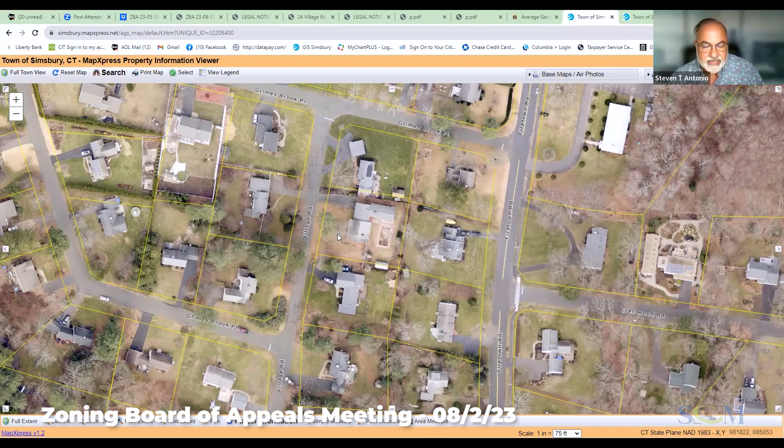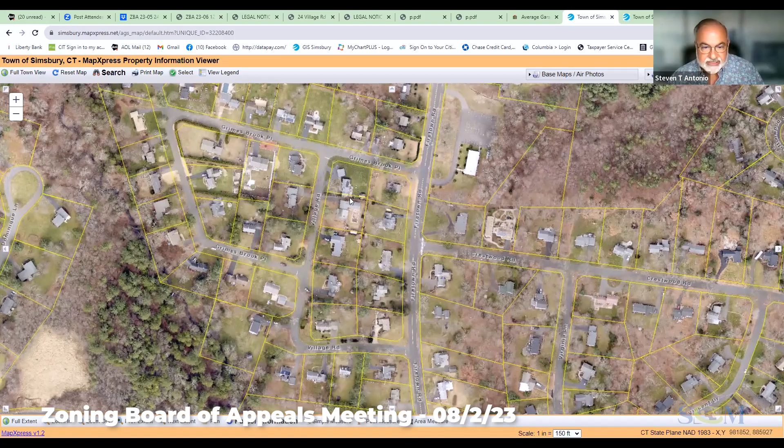My concern, just to bring it to light and why I wanted visual assistance, is he's asking for a 35-foot or 37-foot setback right here, which puts it considerably more forward than any abutting property owner up or down this street, with the exception of this weird one, which was approved in 1984. I'm not really sure what the hardship was that they approved that. I haven't seen anything in my tenure where that would have been approved. But you can see he is a little back, but going a full 37 feet, just to vocalize my concern so we can acknowledge it.

This puts him much closer to the road frontage than any other house in the neighborhood, and I'm worried about setting a precedent. I do understand the hardship and I feel for him and I understand it. As you can see, it's a single car garage, which is very dated and not the norm anymore, but I'm not sure we have the luxury to include in this particular thing.

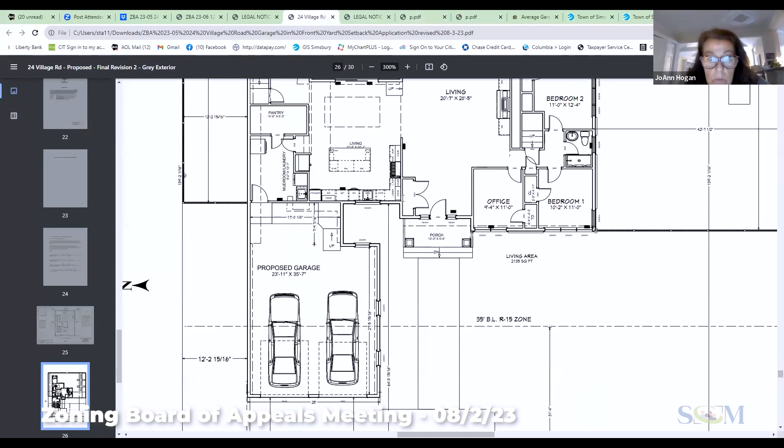Let me stop sharing, or maybe I can just show us. I apologize while I go through, find out which one. There we go. This is the one. So I'm not sure if we could suck up this little area here somehow and bring it closer in general. That's the 7 foot he was describing as the additional, but to be frank, it looks like 7 feet 9 inches plus this area from this point to the front of a car doesn't seem to be minimalized.

And Tarek, one of the things we do is, first of all, we make sure we can't put it somewhere else, but we also minimalize the variance. So that's why I'm bringing this up, is if we can minimalize the variance, it's easier for everybody involved. And that underscores my biggest concern, which is the depth of this garage.

And if anything can be put to this area to the right, we close off this area and allow some of this to be within this area and move the whole garage closer to the house. Tarek, are you following what I'm saying by chance? So your garage, if you will, would be in here, that service area. This is Ram, I have a question.

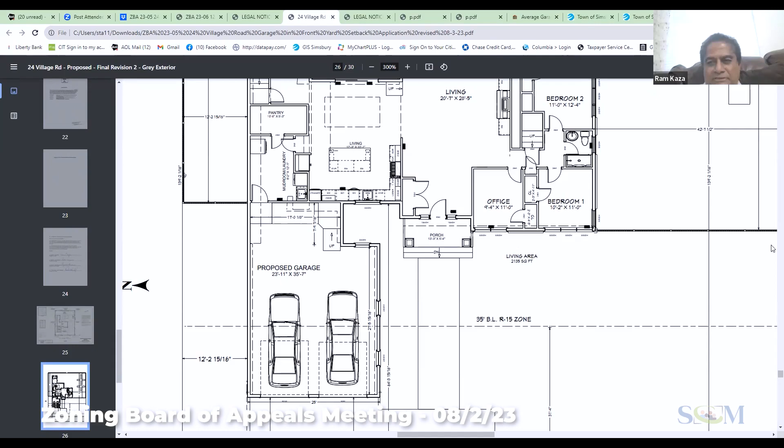Go ahead, Ram. If it is too close to the road, is there any safety concern backing up the car from the garage? I don't think so, to be frank. No, because there's more than a car length at least, and this includes a K-turn area, if you will.

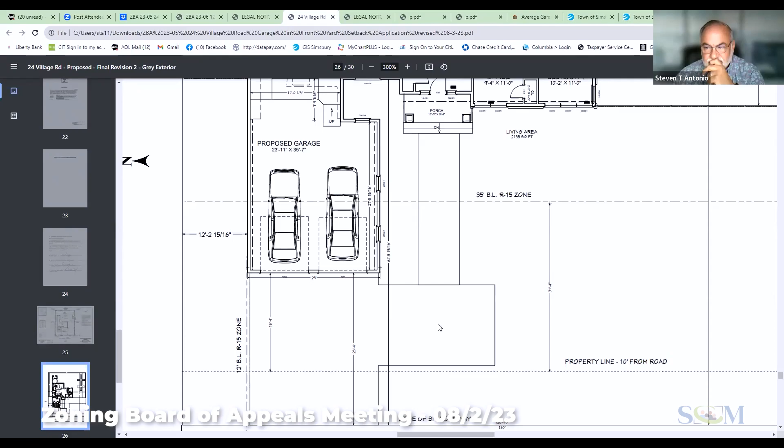Okay, so I understand your point, Stephen, for trying to minimize the footprint. Again, we're looking to accommodate this accessibility ramp here, and so I understand that's in conflict with the objectives of the ZBA, and so if there's as well.

So where it says up, yeah, your cursor's on there right now. Is that the ramp? That's the start of the ramp, yeah, and that travels up. The grade of an accessibility ramp is very low, right, and so even a short rise of 2 feet has a long runway.

That's where I was, Tarek. So if you took this up ramp and made it perpendicular and put it right here, that's pulling us a good 3 or 4 feet forward, just by having the ramp not have a 90 degree turn, which, if I'm not mistaken, is not the best thing to have multiple turns within a ramp.

So yeah, it's like I said, we work with people. We're not just flat out yes, we're not flat out no. We work with you to see what you think is a viable consideration for a meeting ground, if you will. Sure.

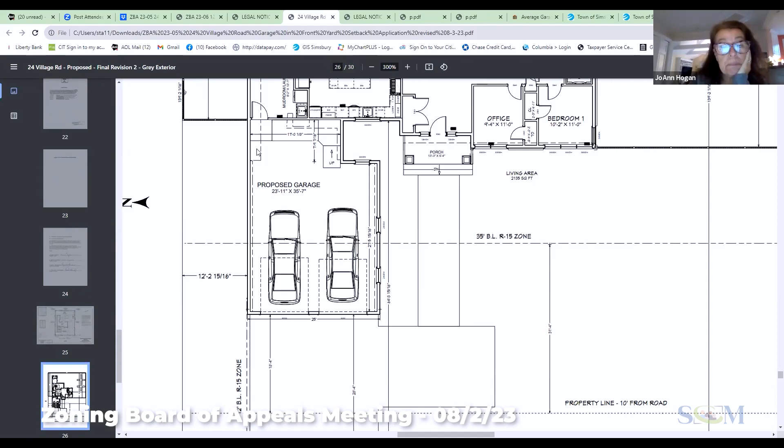Well, it's also, just to bring it back, it's also the topographical, keeping it in line with the other frontage setbacks of his neighbors. Yes, it is the same. It's actually a little bit of a lesser step.

I understand this is from a previous ZBA committee many years ago, but it is less than the setback from the neighbor to the north, just as a visual, which is just that weird one, so that one sits closer to the road than what you are proposing.

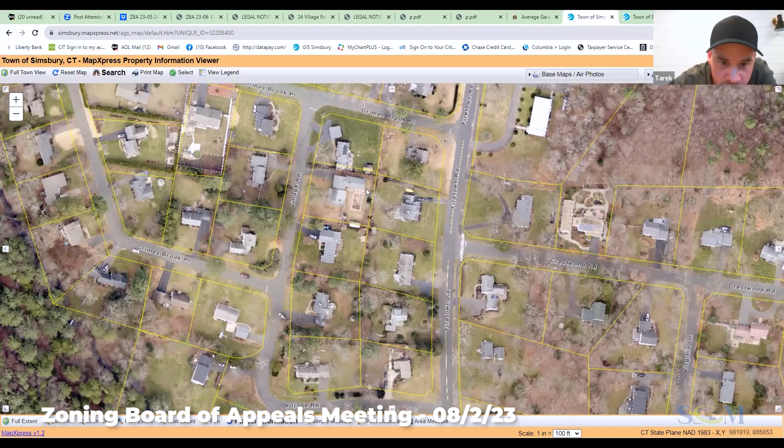Correct. And visually, like on that road, it's kind of amazing, the property to the south, even though they didn't require a setback, their garage is further back. Visually, I think it will look more or less the same. But I think, to your point, Stephen, that would be the area we'd try to absorb some depth at the front of the car, instead of going against the house entirely and losing that little bump-out section.

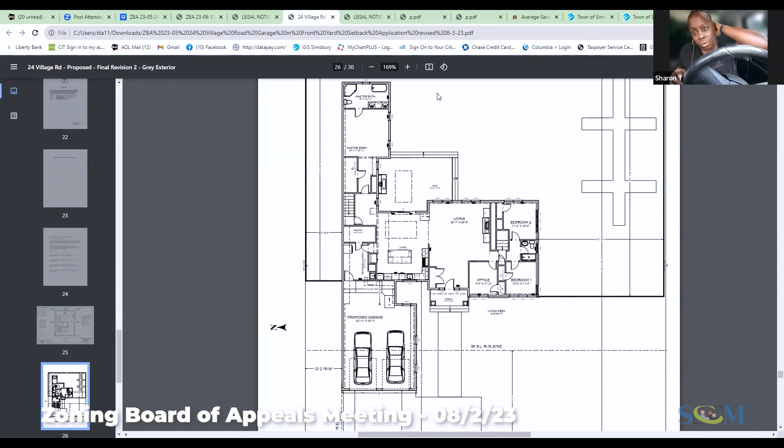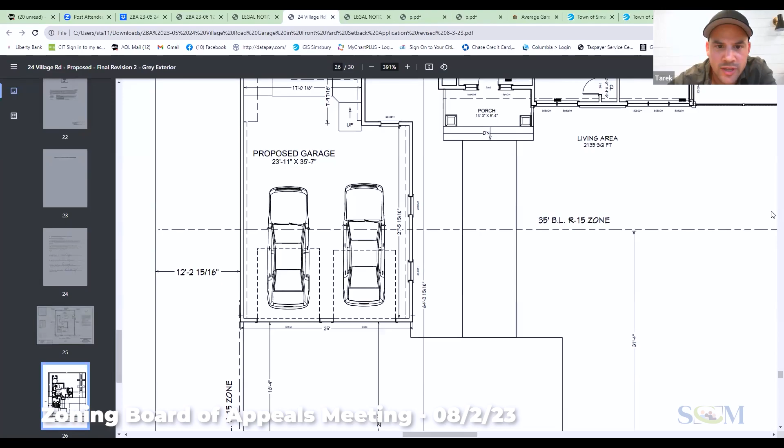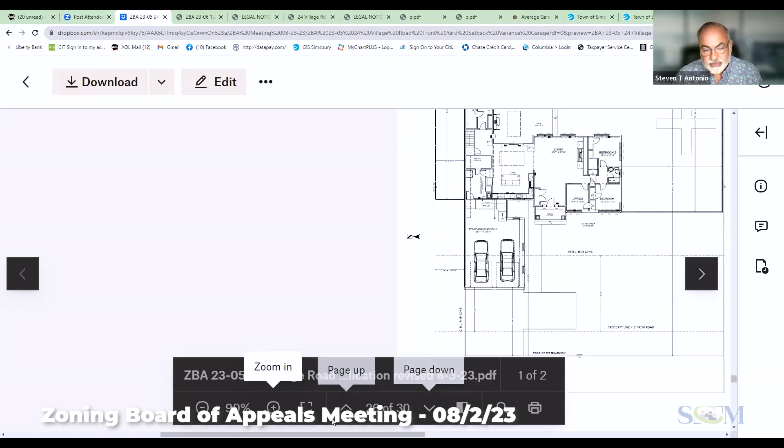While you're doing that, I just want clarification. I understand everything around the setback, but going back to the accessibility ramp, are you saying it's going to be straight on or is it going to have a curve? It will have this curve - this was actually designed with the handicap person, they said this is basically what they wanted. So is it sort of up and then the turn over there? Yeah, 36 feet is a lot of room, a lot of typical space. For a garage, I actually looked it up - your average garage for a 2-car is 20 by 20, 22 by 22, or 20 by 22. These are just standards, so I know they want their ideal scenario, but I'm just trying to find the halfway ground.

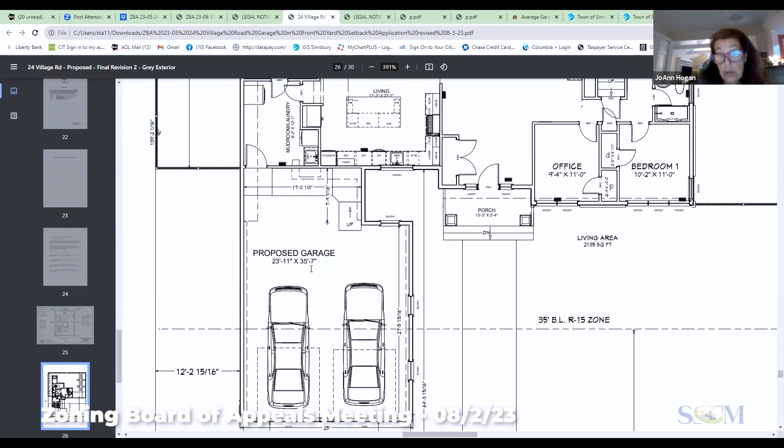Which is why they advise you to do a turn - just to be able to get the grade, we had to do a turn, the length, for the grade. And so this space as well in front of that handicap ramp can also be used for things like bins and such.

All right Tarek, how about this one, just thinking outside the box - what if we make it wider? So these two cars shift to the right and now your ramp follows my cursor all the way back here. That way we can truncate it because you've almost got an aisle for the wheelchair, or what have you, next to the cars. And that way we can move the garage closer because the cars can abut up to here. You're saying wider to the left, Steven?

So instead of this ramp going 17 feet left and right, I'm saying have it go straight 17 feet here. And then the car that's right here would be right here. We close in this area a little bit and make a little courtyard in here, and move both cars to the right so that a handicap ramp can be the correct grade going all the way down. Usually a handicap car is one of the two cars, not both. Are you following me on that, or is it too weird?

17 feet, so it's more than 17 feet. If I remember, it's about 20, 22 feet.

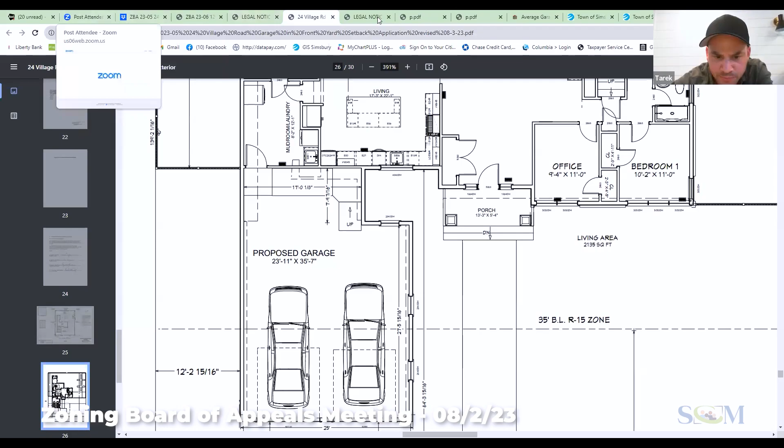The other thing is, from a design aesthetic standpoint, to be in harmony with this being a big garage, I think increasing the width is going to make the house look a little bit lopsided, having the doors to the street like that and making it a little bit wider. I think it's going to look funny. I like the creativity, but I don't think we're going to be able to accommodate the ramp that way as a straight shot -- I think it's just too long. And I don't think the design would look right for the neighborhood.

Is the porch shown on that drawing existing yet, or are you adding that? No, that's the existing -- Steven just had the existing photo up. That porch is being added.

Does the bump out come right to this edge, Tarek? No, the bump out goes in a little bit from that edge. If you see that window there, existing to the left of that corner -- that bump out is going to come to about right where you have your pointer there. And then the garage will be basically in line with the corner of the house, which is going to be a little bit further back from the bump out.

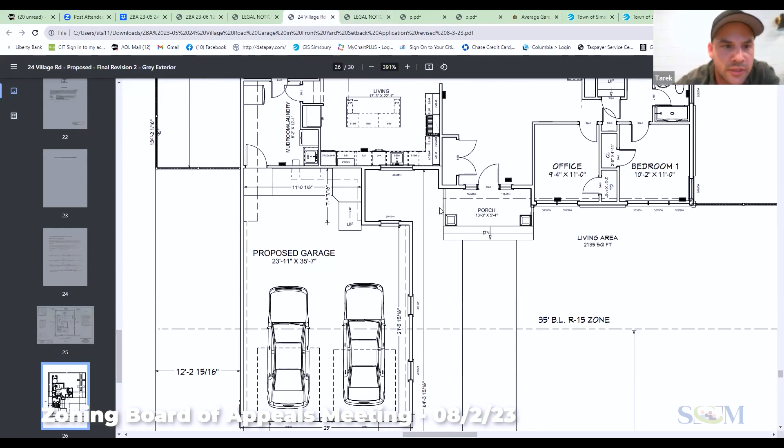If you put the reveal here, that's kind of weird, isn't it? If you go to the rendering on the next page, that'll show it better -- it's also in the staff report, if you scroll down. There you go. So you can see how that window from the kitchen peeks through. That's really the purpose of that bump out -- in addition to accommodating the ramp, it's to allow for that window in the kitchen.

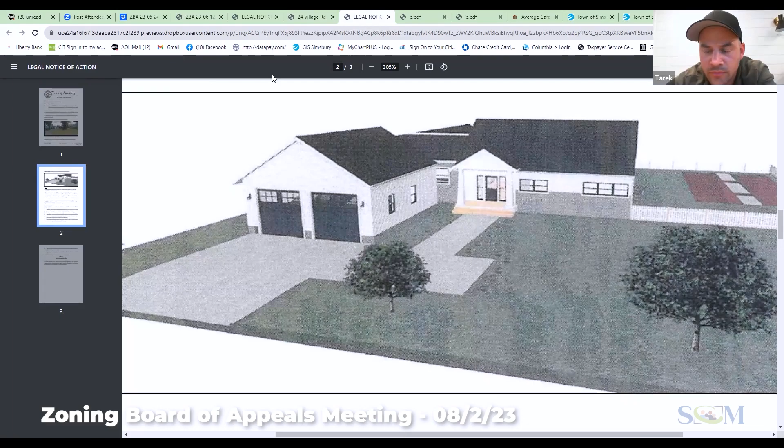Okay, let's poll the commissioners and then we can drill down on this. I don't want to make our next applicant wait too much. So let's just poll the commissioners. Ram, have you asked any other questions? I know you asked one quick question. I'm good for now, I don't have any other questions. All right, Sharon? I don't have any other questions either.

Larry? Other than I think it's a little too deep, I have no other questions. Okay, and Mark?

I think you're kind of splitting hairs, and with the neighbor support -- I was thinking about whether you could do it on the other side of the property, but that doesn't make sense with the bedrooms there, and the septic. So to me, I don't know. I feel like with the accessibility, and wanting that room to maneuver with a wheelchair for access, and then it goes up into like a mudroom.

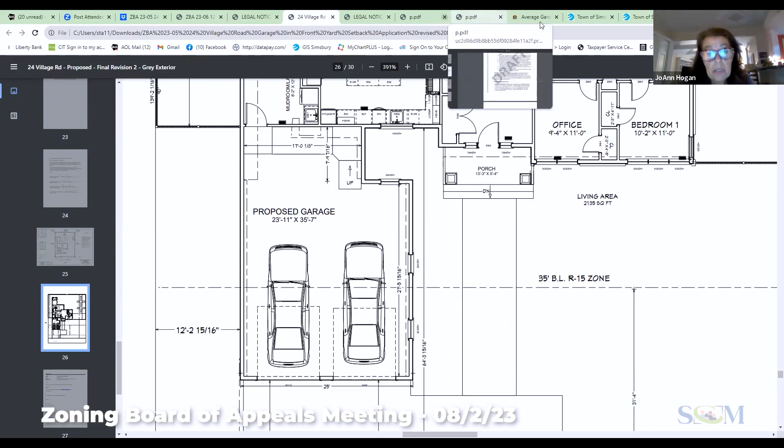And I see what you're saying, Steven. I'm not going to split hairs over a foot necessarily, but I do think that that's the place to make this variance be more in keeping with what we're comfortable with passing, based on, as you've said, setting precedents. There is that house next door to him that has that kind of wonky garage that I'm not sure how that happened, but it is there, and his is going to be set back further than that one is. Maybe that one got passed because it has that corner lot problem. I don't know what was going on there, but he is - oh, go ahead.

JoAnn, is it going to really be set back as far? I thought he was saying that it wouldn't be. It will be further back toward the house, I think, than that one next door to him. It won't be as close to the road as the one next door. Okay, so it's a little bit more palatable than that one next door, in my opinion.

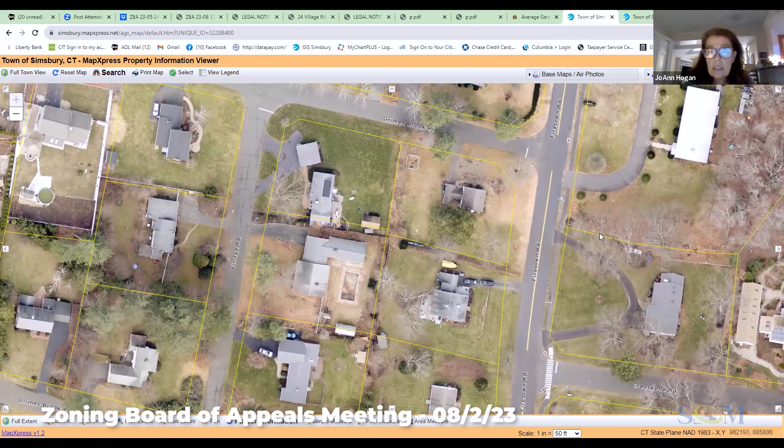So yes, the precedent is kind of touchy. There were other houses in that application that showed garages like that. There were some pictures in other parts of the neighborhood that had those front garages. These tiny little lots - I get with these tiny little lots, there's not much you can do. These 1950s houses that we have all over town, improving it and making it a more valuable property, I applaud that piece.

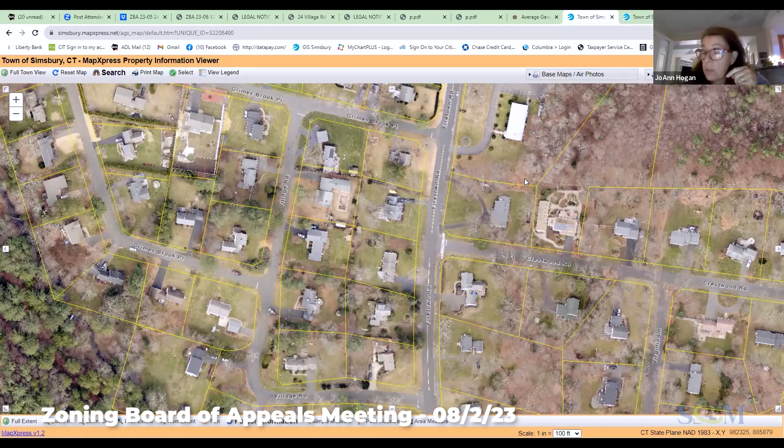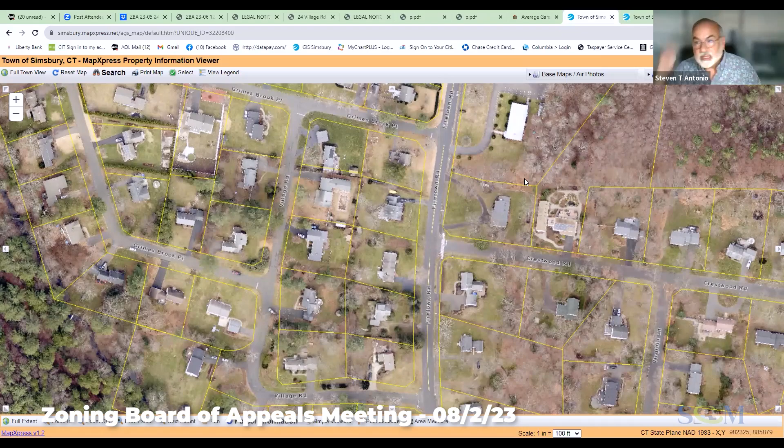So I would be more inclined to go with the 4 foot. If 5 feet is doable, I'd be happy with the 5 feet. Okay, well, it's a cushion area. I think either is viable, to be frank. Let's continue polling the commissioners.

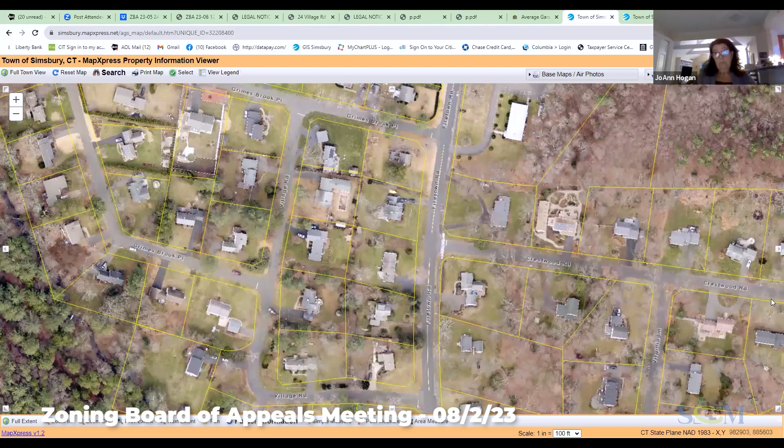Larry, you're next on my screen, what are your thoughts? Well, my concern is the way the plan looks now - if there's a car parked in the driveway, that is going to be very, very close to the street. I think if you can reduce that 4 or 5 feet, that's the answer to it, because then we won't have that issue. But if there's only 18 feet in front of the garage, plus the other area that we don't count, it's just a matter of safety. But I'm good with the 4 or 5 foot reduction in the depth. I mean, the average car is about 18 feet now.

So, Larry, if you were going to pick 4 or 5 feet, which would you pick? Just so we start getting - I think because we're looking at something to make it accessible, I would go with just reducing it 4 feet. Got it, no worries, just giving them a little more room to maneuver for people with disabilities. I think that 1 foot could be a big difference.

Okay, no worries. And Ram, moving along to you, your comments? Yeah, I echo Larry because of the disability accessibility movement, I'm okay with the 4 feet adjustment, but at the same time, I have the same concern about the safety. If there is a car parked in front of the garages in the driveway, it will be too close to the road.

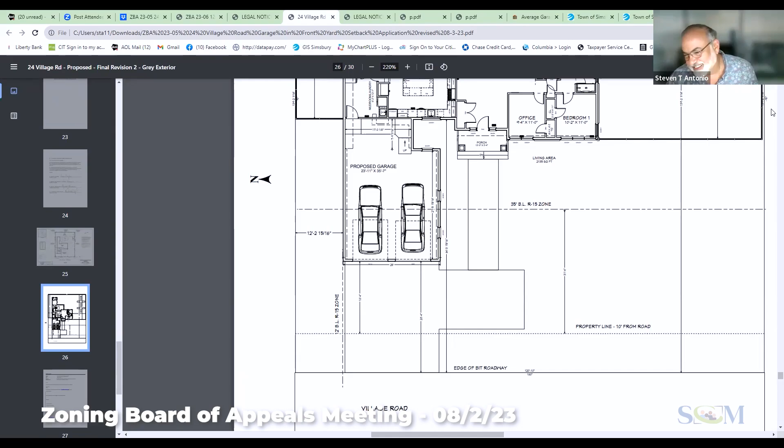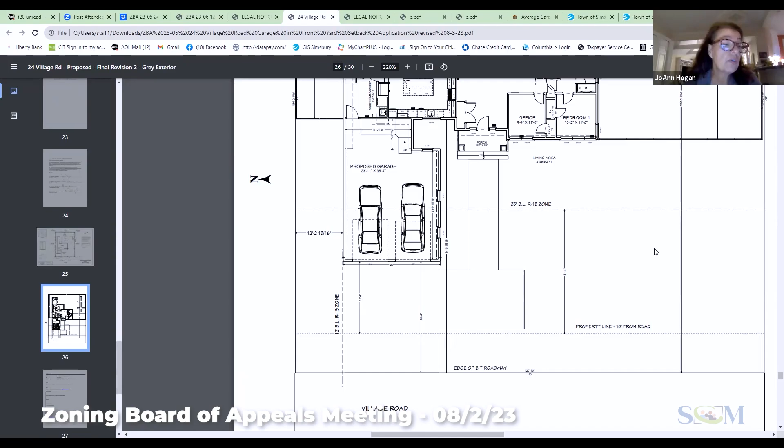Okay, so I'm going to back up a little bit. I love this. Pursuant to the Simsbury zoning regulations, section 3.9, for the construction of an attached garage that measures 23 feet 11 inches wide by 31 feet 7 inches deep, on the property located at 24 Village Road, zone R15, based upon the following findings: the hardship being the need for handicap accessibility, the limitations of the lot size, and the location of the septic. Thank you.

Great. Who would like to second the motion, perhaps? I'll second. I'll second. Ron got it. All right, all those in favor? Aye. Aye. Aye. And Mark, I didn't hear you. Are you an aye? Aye. That is unanimous. Thank you very much.

Tarek, thank you for taking the time and also working with us. I wish you the best of luck. Thank you. Okay, with that being said, let's move right along to application number...

Application ZBA number 23-06 of Andrew and Amelia Dalton, owner applicants, for a 25-foot variance to reduce the side yard setback from 40 feet to 15 feet, pursuant to the Simsbury zoning regulations, section 3.9, for the construction of a 512 square foot in-ground pool on the property located at 12 Browngate Lane.

Andrew, I'm assuming that you are going to present on behalf of yourself? If so, could you please state your name and address for the record? Yes, I will present on behalf of myself, Andrew Dalton, 12 Browngate Lane. Okay, so basically tell us what you're planning and what the hardship is, please.

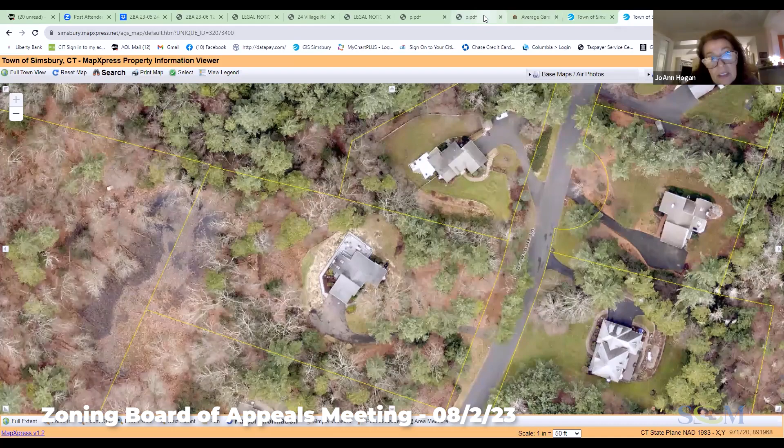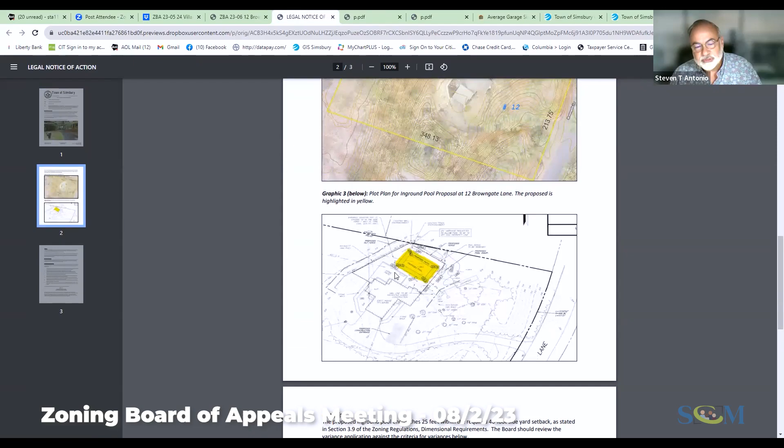So this is the existing patio here. The pool is going to abut it. What I'm asking is if we could lower the amount of patio I just showed you and move this pool in, which would reduce our setback request, which is this line here. You can see how far over the setback line it is, and they already have a variance, I might add, just if we could pull it forward.

Andrew, is that something you would consider? I would be willing to consider that. I think the size of the pool was listed as 512 square feet in the application. The dimensions, I believe, are actually around 12 by 24, so that 512 may be including the patio space. 12 by 24 is a little bit on the smaller side of a normal in-ground pool. I think typically they're 18 by 36.

So we already reduced it a little bit to try to stay within the guidelines as we could. I think a pool could go to like 10 by 20. I'm not exactly sure what the variance request required for that would be, because of the angular nature of how the property line crosses across the pool. But I think it would be possible to put a slightly smaller pool in and reduce the variance a couple feet. As I mentioned before, you cannot see the pool either from the property to the north, because it's set lower from a topography standpoint, or from the road.

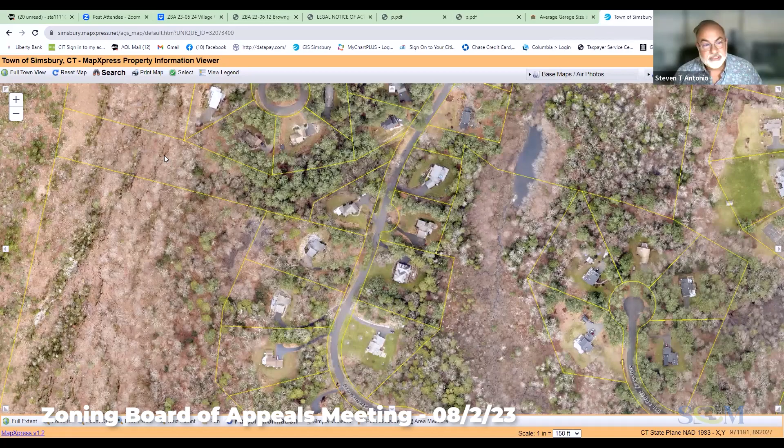But going back to this, what about pulling the pool so there was not grass between the patio and the pool? Would you consider, and again I'm just asking these questions, you don't have to say yes, abutting the pool so it directly abuts your stone patio, without the grass gap between them? The reason we'd prefer not to do that is that the chairs that go around a pool, where you can sit down and lie down, typically need about 8 feet to fit. We wanted to put chairs against the patio looking into the pool, because of the direction the sun comes across the house in the afternoon. So that was the rationale for how far we pushed it off the patio, to enable some chairs there.

Okay, sticking with that same thought, again just my observations, no right or wrong answer. Would you consider elongating this area behind the setback line so it's deeper for your chaise lounges, and reducing the width of this base leg, for lack of another term, to half its diameter? Usually you have your seating area in one spot; this would let you have one seating area here and another there. Is that something you'd consider? Just to make sure I'm understanding, Steven, are you talking about pushing the pool in a southeast direction? That's one valid interpretation, but to be honest, what I meant is this depth here, which I'm guessing is like 6 or 8 feet, make that 12 feet, so you've got your chaise lounges down here without breaching the setback line.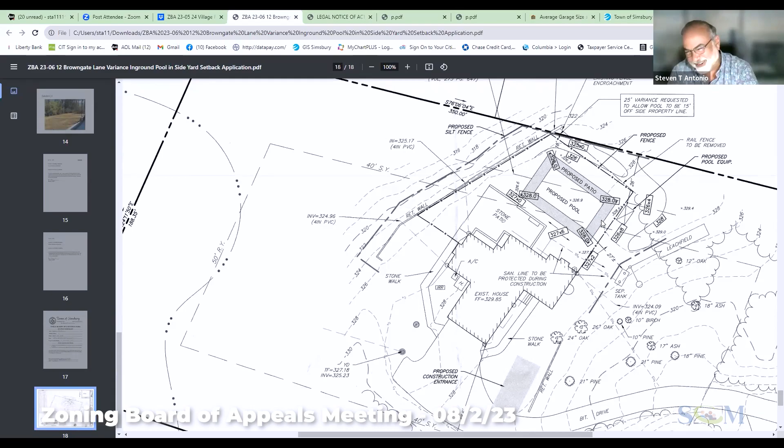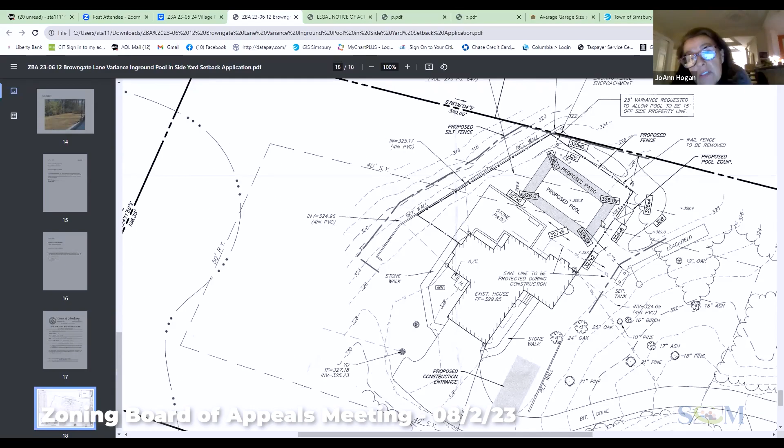All right, then JoAnn, what do you have for questions? So the variance, that being said, have we made sure that this variance is only for the white rectangle?

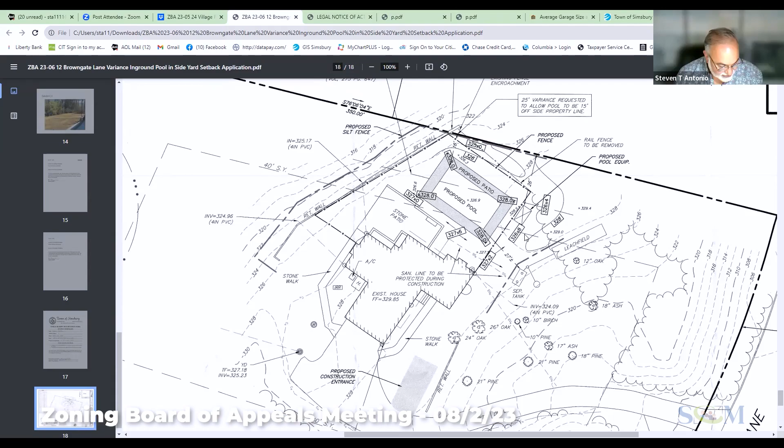Because that doesn't look like that many feet. Oh wait, the 40-foot setback. Oh I see, so the 40-foot setback is all the way to the corner, the bottom right corner of the pool. This is the 40-foot setback. Yeah, so almost the whole pool is in the setback. Correct. Okay, the normal setback, because we had the variance approved, or previous owners had the variance here.

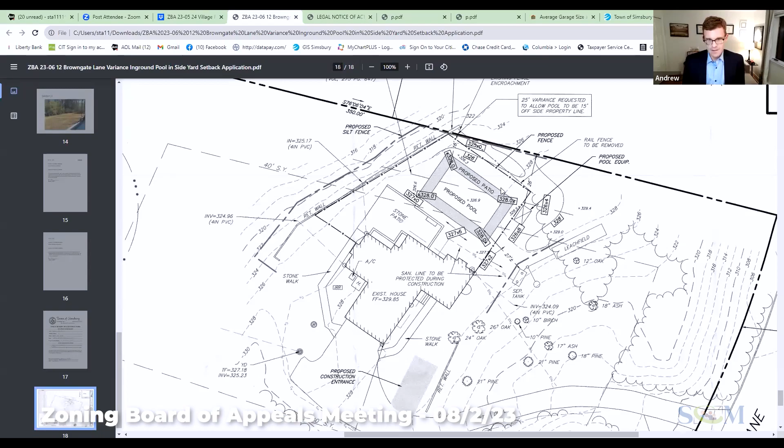So you had a variance approved in the 1980s, there's already a variance that travels with the house. Correct. And to give the board a little bit of backstory on that, that was submitted and granted in the 80s. My understanding, talking to Laura from the town, maybe in April or May, was that the pool that ended up actually being built was not in compliance with that variance. It went across it. That pool was removed by previous owners around 2008. And if I was speculating, they could not get a normal size pool to work within the 15-foot variance, and so that is why they incorrectly built it not to the variance. Right.

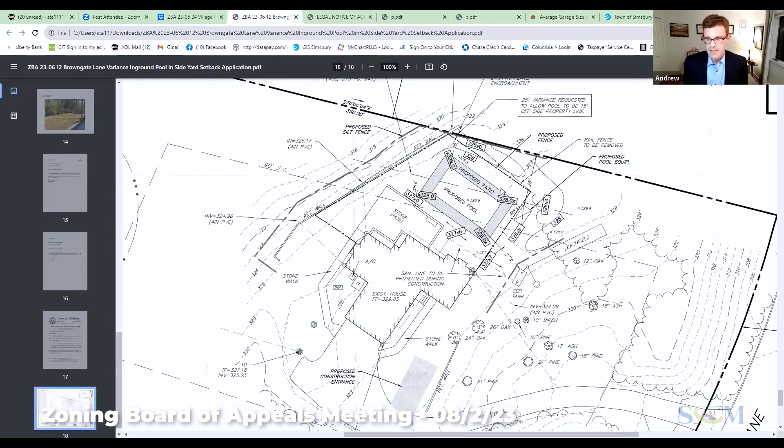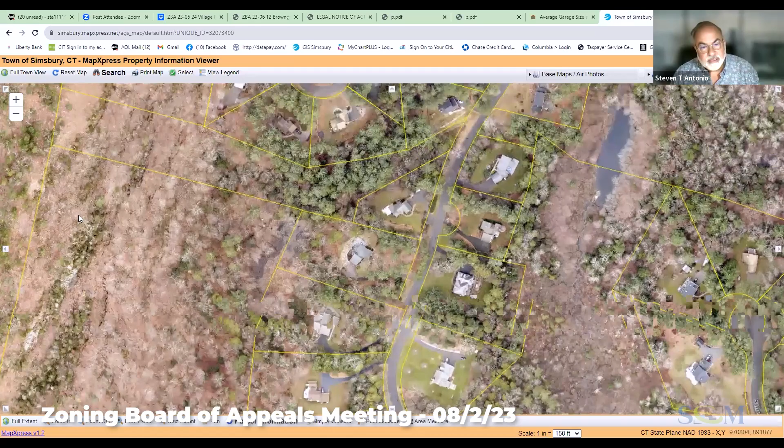So I'm just going to switch back just to remind everyone how isolated this area is, because I think it's relevant to what we're discussing. The pool is here in this section. Okay, with that being said, Ram, do you have any questions or comments?

Your microphone's muted right now. There you go. Did he mention anything about the hardship yet? Oh, I'm not sure, Andrew?

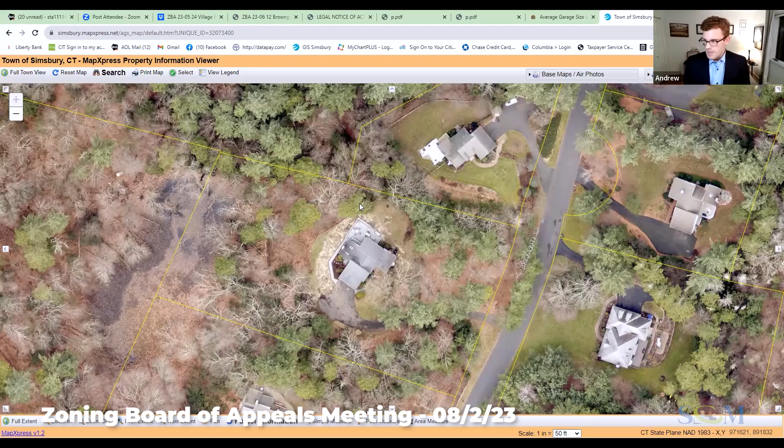Okay, because of that slope, there is no other place that they can put it. Now you can see that's the same flat area right here, Ram, if you look. Yep. And then if you go this way, it falls. And it really falls pretty steeply, and there's even a retaining wall in the back, right? Because it's so steep. Correct. Yeah.

I don't have any other questions, Steven. All right. Somehow Mark has moved up on my screen. Mark, yeah, you're now in the third position. You're on mute though. Yeah, that's great. I'm like a horse coming from behind here.

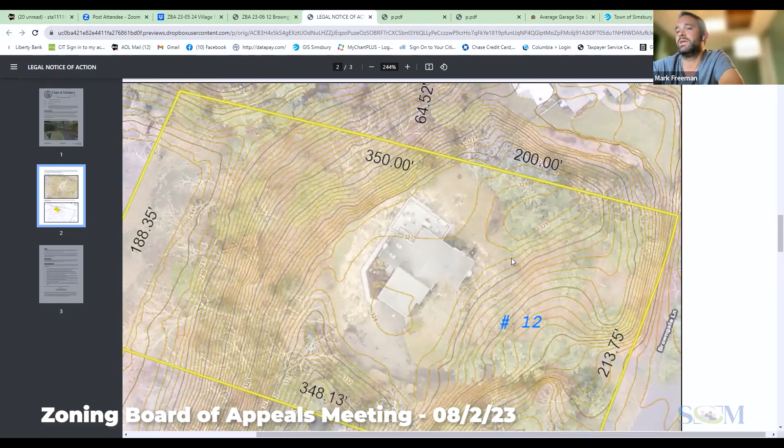Yeah, I don't see, like Stephen, your proposal to move it even just to the south. I think that's southeast there. I don't know if that does a lot for anyone. It's kind of, you know, maybe you gain a foot or two, I don't really know, but yeah. And then there's not a lot going on in the back, like you said. It's sort of that part of Simsbury where it's not dense, you know, not near town sort of. But I think that with that, it's a large ask.

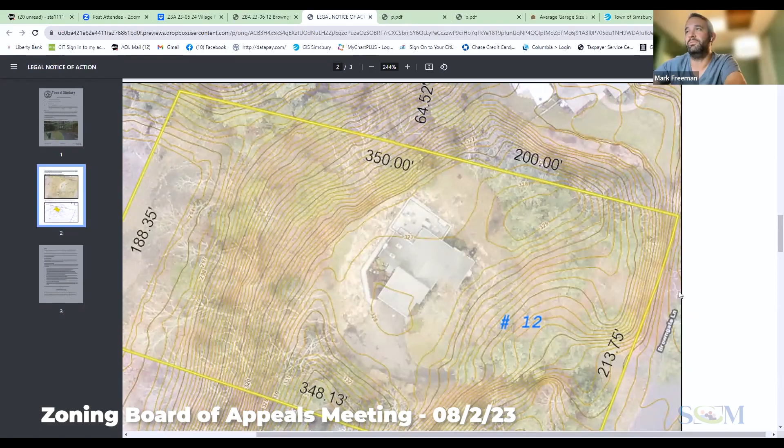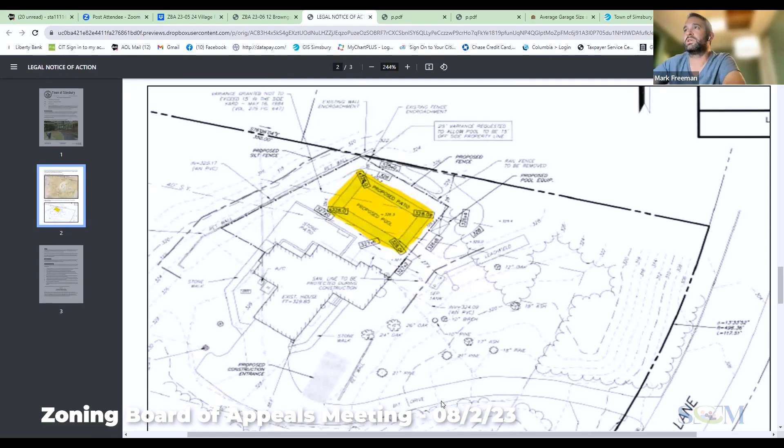It's a lot - I mean, 25 feet, what we were just looking at, 17 feet, and we were getting up in arms about it. And I think this is a little bit different though, it's not as densely populated and with neighbor support. And then with the slope on the property, just looking at the map and everything included in the paperwork, the application here, there's really nowhere else to put it.

With the realization that it's not the patio, it's the actual pool, I don't know, you gain a lot by shifting it diagonally, the way you look at the map, diagonally down, to the right.

Mark might add a comment on that. We wouldn't really be able to move it that far, because if you note the location of the septic, we need to be 25 feet from it. I see the leach field. Right now, as drawn, it's 27 feet from the leach field, or from the tank. So there'd be a limited distance we could move it without having an issue on that side, just as additional context.

Is that retaining wall existing, or are you building that? There's a retaining wall on the side of the pool facing the very steep sloping area, on the northwest part of the pool. There's not a wall on the southeast part of the pool. Okay, that's the retaining wall there. Correct, yeah.

I don't think you gain a lot by moving it. It's a lot of footage — I don't know if that's a word — but that 25 feet is a lot. Again, it's not that densely populated and you have neighbor support, so I don't see what else you could do there.

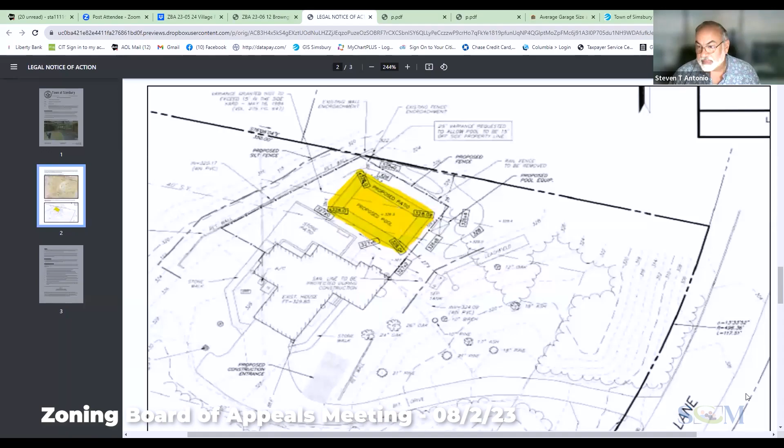Hearing none, does someone have the staff report to make a final motion, Andy? I do have it in front of me. All right, not to always defer to her, any of you can do it, whoever wants to, feel free, but I have it on my phone here.

I would move to approve application 23-06, Andrew and Amelia Dalton, owners and applicants, for a 25-foot variance to reduce their side yard setback from 40 feet to 15 feet pursuant to the Simsbury zoning regulations, section 3.9, for the construction of a 512 square foot in-ground pool on the property located at 12 Browngate Lane, assessors map C04, block 203, lot 043, zoned R800S, based upon the following findings: the hardship being the topography of this property does not have any other usable flat space for a pool.

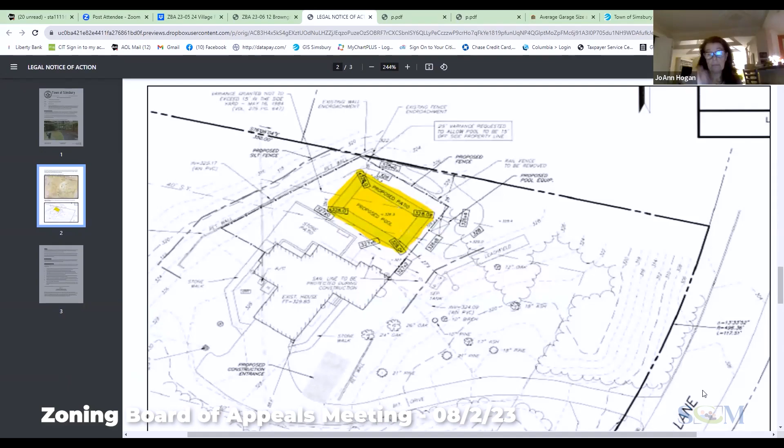Who would like to second this motion? I'll second. All those in favor? Aye. And it is unanimous. Thank you very much, Andrew. Have fun in your pool. Thank you, appreciate the board's consideration.